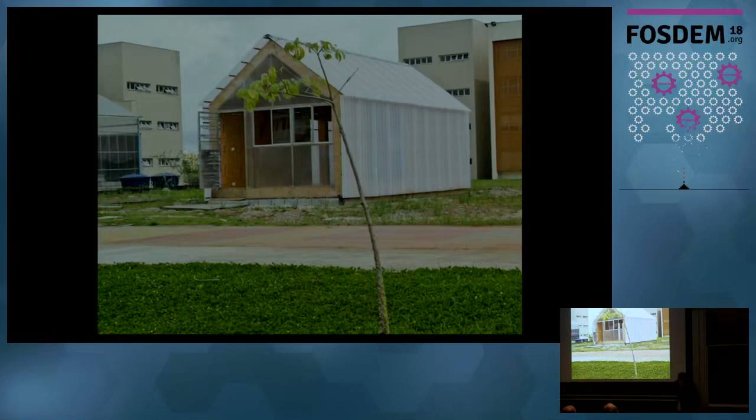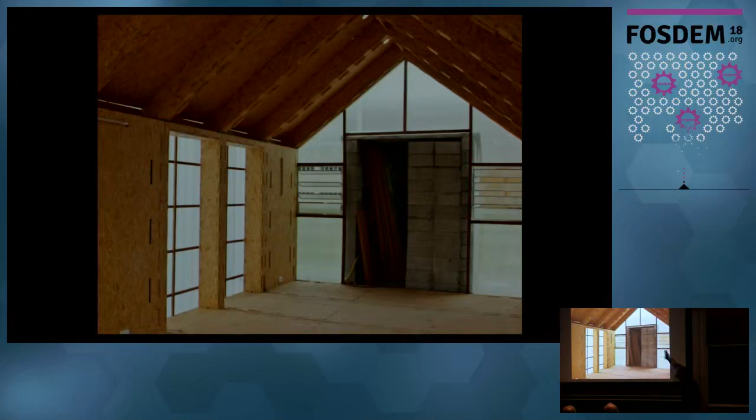So this is our building after all the work. It's been built during about 3 months. This is the inside. It's not 100% finished. You see that there are still a lot of problems, but it's basically there and it's done. This is how it started being built. You begin to build those structures that you see here on the ground, then you put them up, and then you put the parts that bind them together. I will explain all that a little bit later on.

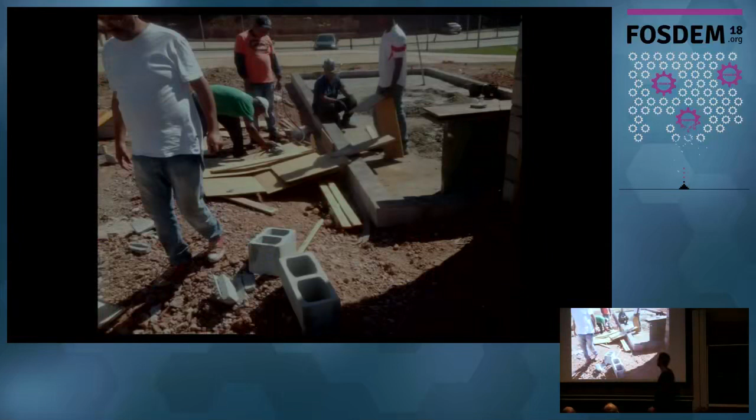So we began to build like that. This is the base wall; we didn't build that ourselves. We just hired a contractor to build these parts that are more traditional construction, and one part of the experiment was to have a mixed system with a part that's built by professional builders and one part that's built with volunteers, and see how that could work together, how the experience of one could help the other.

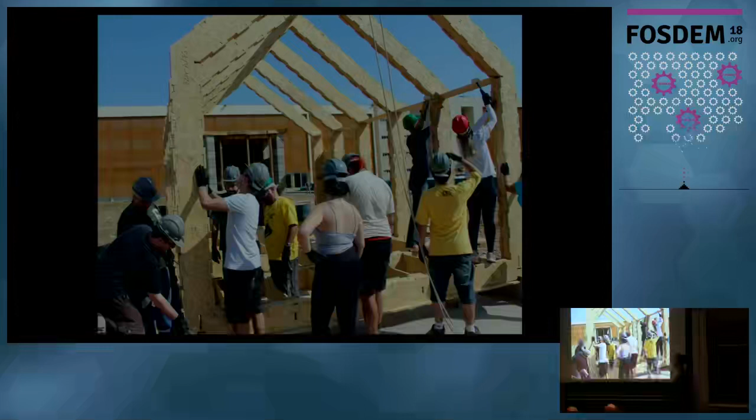And that's the actual building with everybody hammering crazily. And that's really the big part of it. If you look at the result, it's not so impressive. It's just a little house. But the process of it, everybody there who built this thing went out of there saying, this is the best experience of my life. I actually built a house.

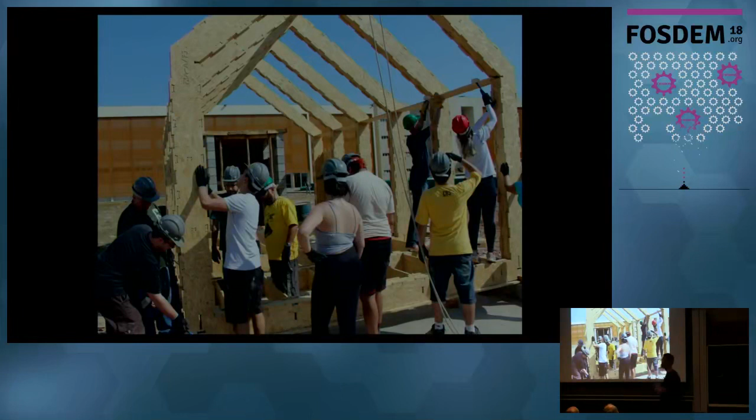And the whole point of the thing is actually to be able to build your own thing. Not so much that the result is so impressive or so special, but the fact that you are able to do it with no knowledge at all. Everybody who was there came without any experience, and after 1 hour you are a professional. You understood the whole system, and you can teach the others how it works because you know it by heart.

So this is the first person who lived in the house. This is after you finish the structure, you put the panels on top of it, and it's rigid. Normally, it doesn't need any more fixation or anything. We decided to put some screws here to make it stronger, because we're trying to make it last.

Because most existing WikiHouse projects, I will explain a bit more about WikiHouse afterwards, have been built inside an exhibition, for example, or were temporary things that were dismounted after 1 or 2 weeks. And now there are, I think, 3 or 4 that are built to last in the whole world. So this is still experimental.

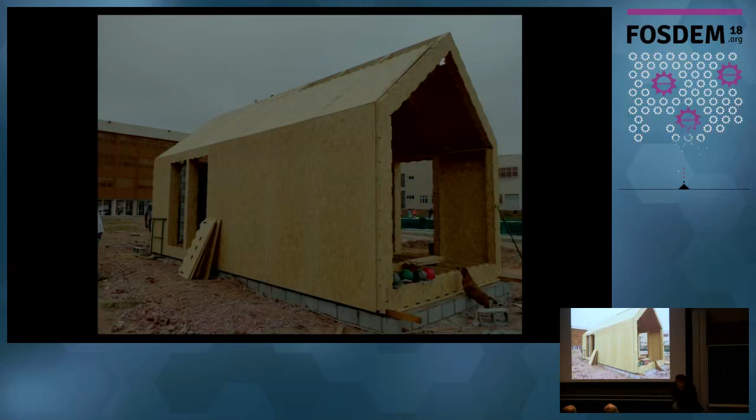We don't know how long it will hold, but we try to do our best to make it last many years. So that was a big problem. The construction was slow. We had to protect it from the rain, and we didn't think well about that. That was one of the biggest problems we met.

Then, since we are in Brazil, we have a very soft climate. Basically, you never have to protect against cold or against heat, because we're in the southern part of Brazil where it's never too hot and never too cold. So basically, you can forget about insulation.

I will show afterwards what they used to do in Europe, because the WikiHouse project is from Europe. So they have to be really careful about insulation and not letting any cold or any humidity enter, because humidity is terrible for the wood. It cannot take water, otherwise it begins to rot and to change shape, and that's terrible.

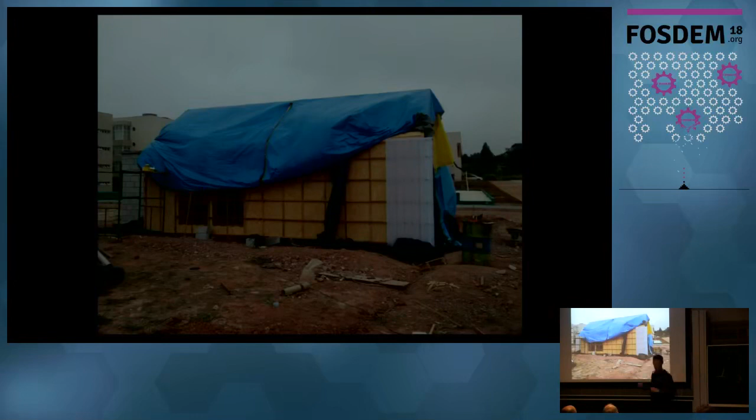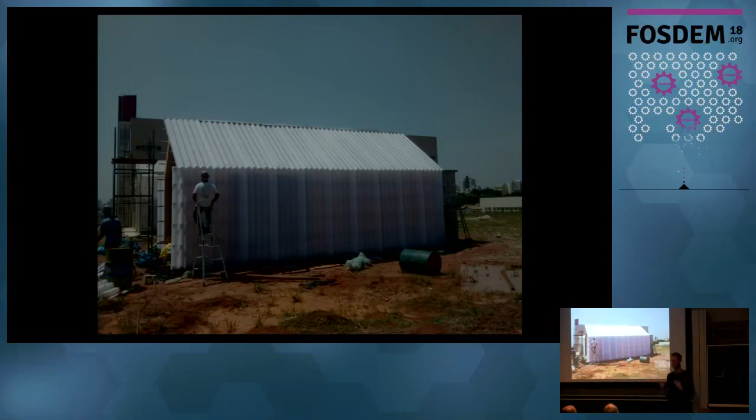But in Brazil we don't have so much of a problem because the air is helping us instead of being an enemy. So what we decided to do, instead of cladding it inside a skin, is to let it breathe. So we use this material, and we left a space between it and the wood, so the air could flow all the time and enter below and escape on the top. So the air would flow all the time and keep the wood dry all the time. And this is working quite well, actually.

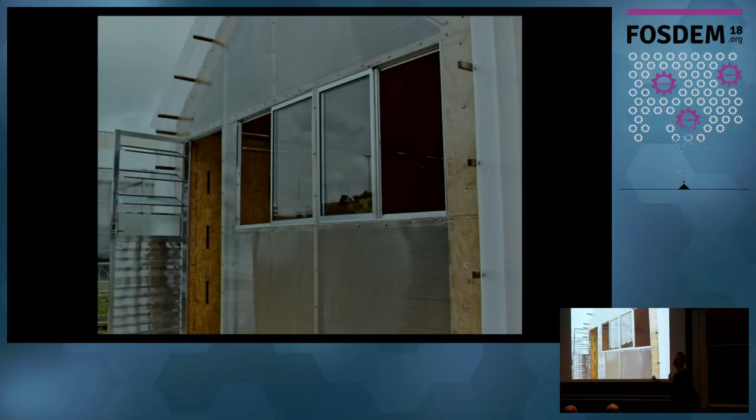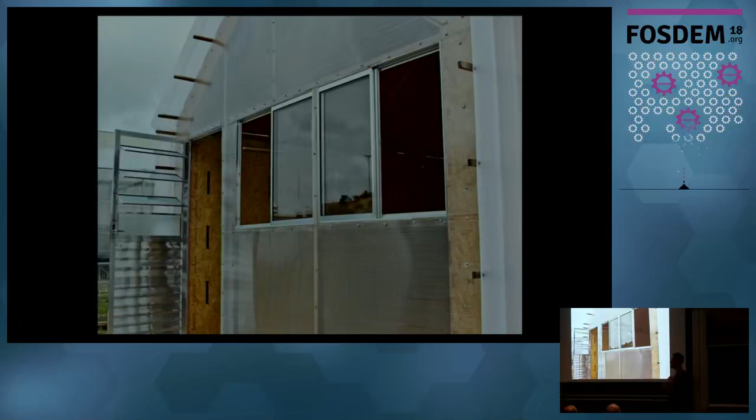So it's all open on the sides. The air can flow between all the parts of the structure, because we don't have to care much about being tight, because it's not important there. If you have a bit of air that goes in, nobody cares. It's even better. So we have a completely different situation than in Europe, and we were able to experiment with these quite interesting air circulation systems.

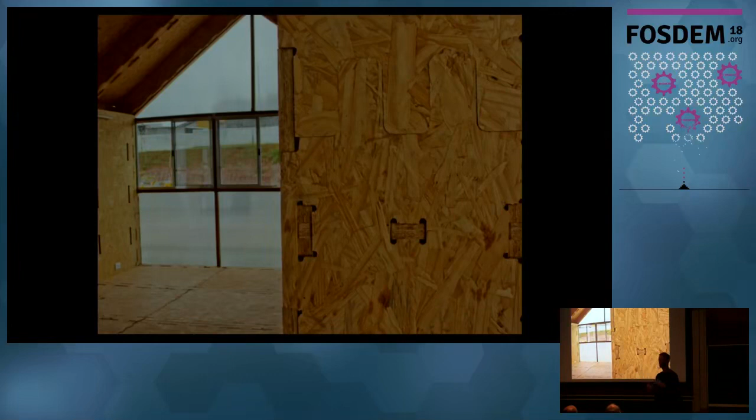And this is the inside. You see the details of how the joints are made, and they are really tight. That's the advantage of having this wood cut by a machine: the precision is absolute. So you can actually dimension these things to be just tight enough that you need a hammer to put them in. And once they're in, they are very strong. We did a bit of testing to adjust the calibration of the machine, but the first test was okay, because the precision is built in.

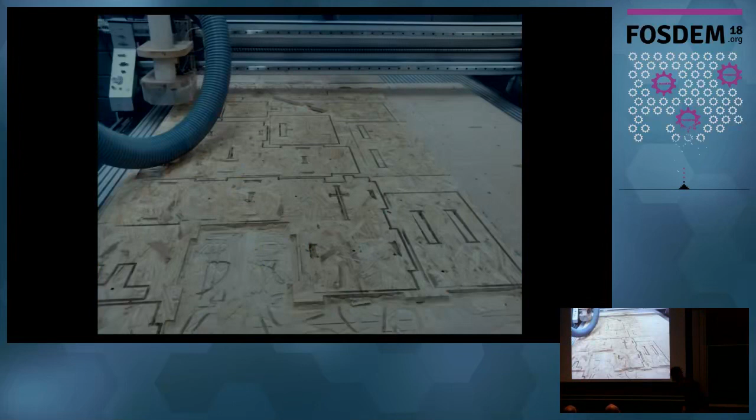And so this is what the machine does. It basically comes from your model. That's where FreeCAD will enter, and that's what I will explain now. Basically, your FreeCAD file goes to the machine, more or less. I mean, the process is quite straightforward.

And these are the pieces, it's quite a lot of wood. This whole house is like 170 pieces of wood. It's like 2 piles that size, and when it begins to accumulate like that, you really have a problem where to put them before you use them. And a little bit to show you the details.

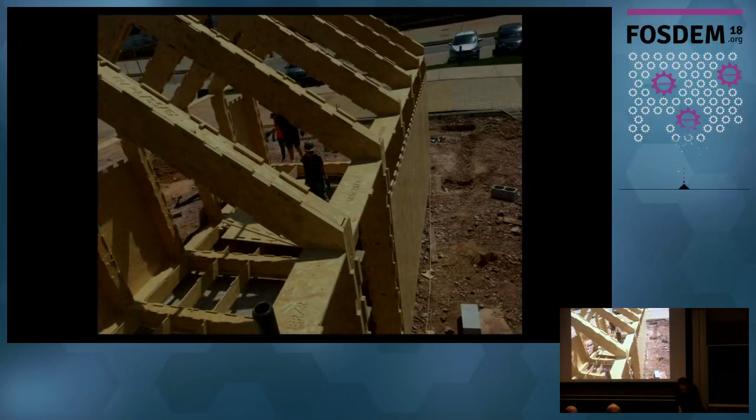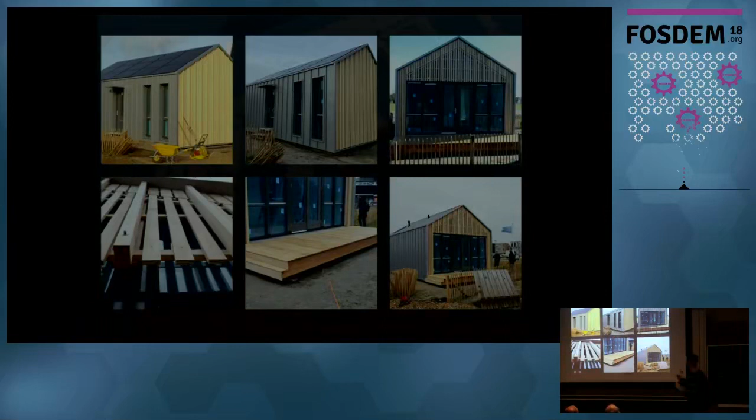This is another WikiHouse they've been building. They're finishing right now in Almere, near Amsterdam. There was a bit of competition over who would finish first, and we won. But ours is much easier, so that's why we won. We don't have half the complexity they had to cope with here. But if you see, it's exactly the same system, exactly the same shape and exactly the same problem. So this is the WikiHouse project that we took our shape and our system from.

This is a system that was begun in 2011 by two architects in the United Kingdom. They built, I think, above 30 or 40 in the whole world, but those that are still there, that were built to stay, there must be about 4 or 5 now in the whole world, I think. 2 or 3 in the UK. Now we have one in Brazil, and there is this one in Almere.

It's fully open source. You can just take their files and adapt them like it was code. It's 3D models and the whole system of how you build it. They have manuals as well. They have a lot of resources outside just the files, which are files as well, but you understood me. And it's now well tested.

I mean, you see that in the first ones there were lots of defects in how the joints would work, and the whole thing would go like that. And over the years, you have a lot of people who worked on this, even pretty famous engineers. And the system is now extremely solid.

These columns, as we call them, the main structures, are really impressive once you begin to build them. You have like 3, 4, 5 pieces crossing each other, and after the 5 pieces are there, it's extremely solid. Everybody will look at that, and you can really hang a lot of weight on them. And it's a heavy construction, so it has a lot of stability. It's really something that you feel has matured, and it's become something you can really trust.

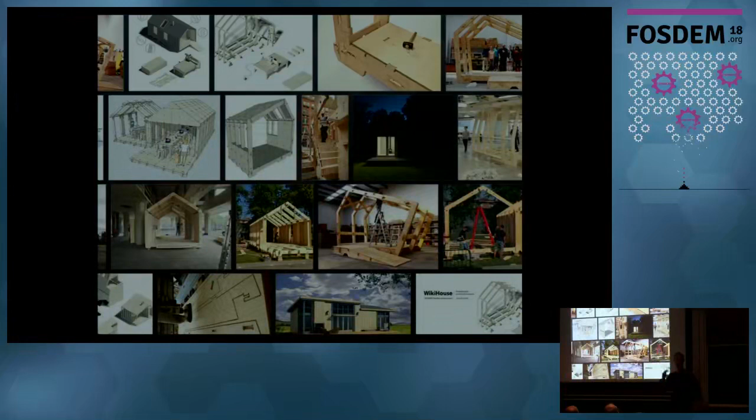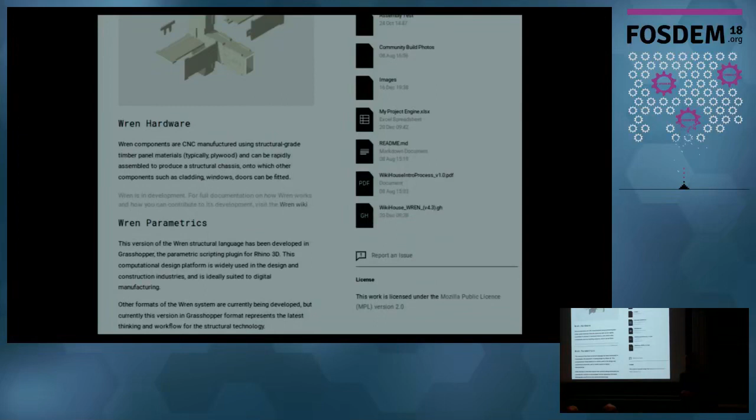That's the kind of stuff you find on the WikiHouse website. You grab their files. All the old ones are based on SketchUp. Those are SketchUp files, but now they're migrating to a scripting system for Rhino, so you could enter the parameters and it would build the 3D model automatically for you. Of course, we try to port that to FreeCAD. That's what's coming now. That's the kind of material you find there.

That's what we used basically without modifying anything, because we wanted to not try anything fancy and take their base system and try to do it well. Next time we'll try to experiment with some stuff, but we really tried to do it the best way we could, so we tried not to modify anything. And it's basically modular. You make it as long as you want. It's just repetition of modules.

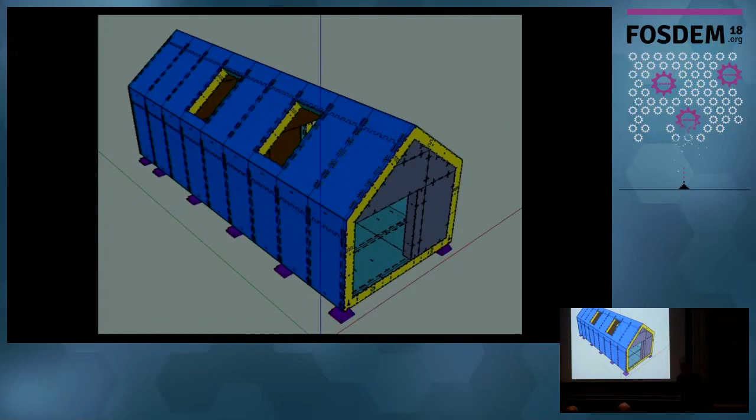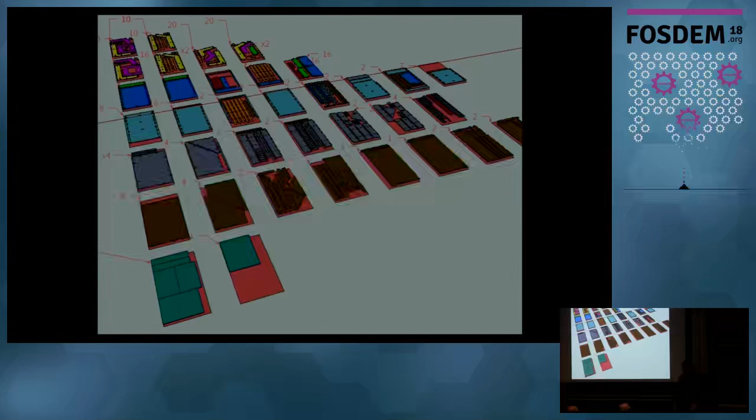In the WikiHouse files, you also find them already separated to be processed into CNC files, G-code files, to be used by the CNC machine. So this is all already set up, but we redid that part as well. And then you have mounting manuals. You see that they say you could use some screws.

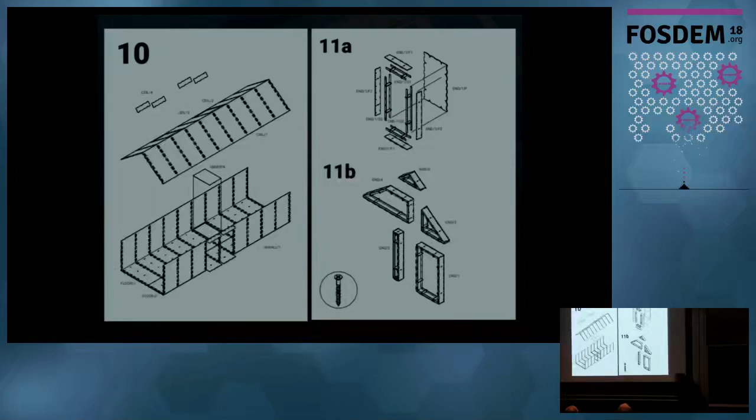Anything you would need to build afterwards, where you would need precise, controlled modeling that you could do and redo afterwards. It's generic, it's multi-purpose. It's used for any kind of stuff, not specially for buildings or for this or for that. A bit like AutoCAD. That was the strength of it. AutoCAD was something everybody used. Engineers, hobbyists, architects, everybody would use the same software.

And it's something that has been lost in the commercial world because they want to specialize, they want to sell specific solutions for each profession. We like to go back to the good old times with FreeCAD and try to have an application that's just a big generic thing that waits for your creativity to work on it.

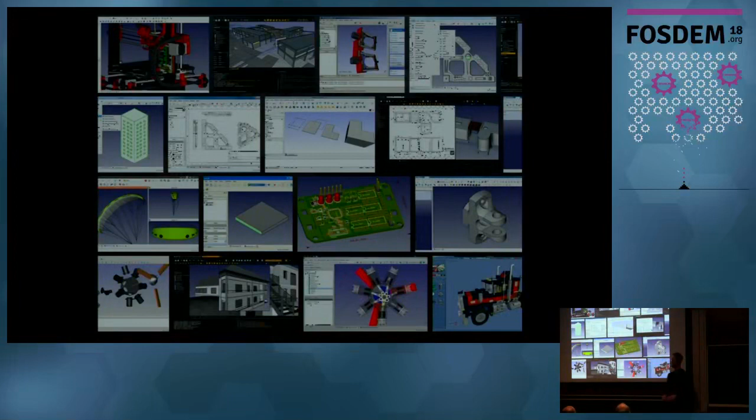And that's the website of FreeCAD. That's FreeCAD, basically. For who doesn't know it, it's a pretty common application. You have a very standard Qt-based interface, a 3D view and modeling tools. The interface has nothing special. That's the kind of stuff that people do with FreeCAD.

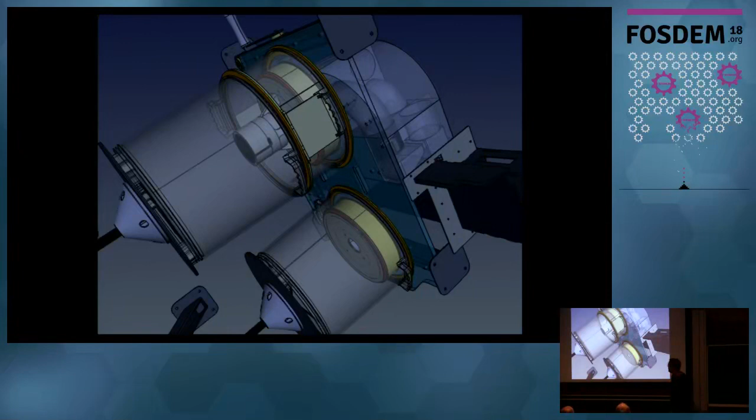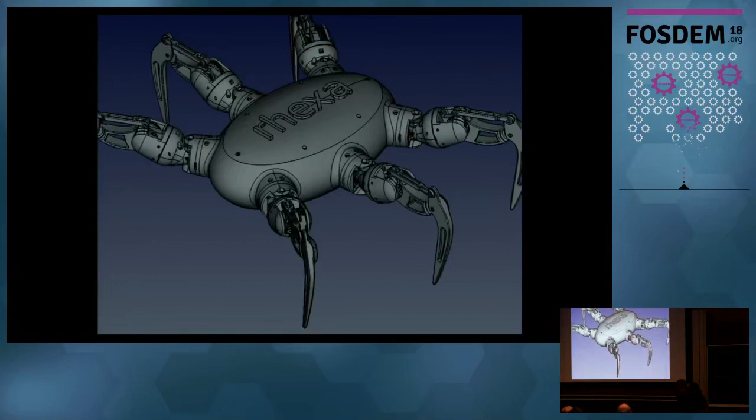Where is Juan? Here. He did it. This one. That's one of the last ones that appeared on the forum. Yeah, people do kind of crazy stuff with it, more and more, and houses as well.

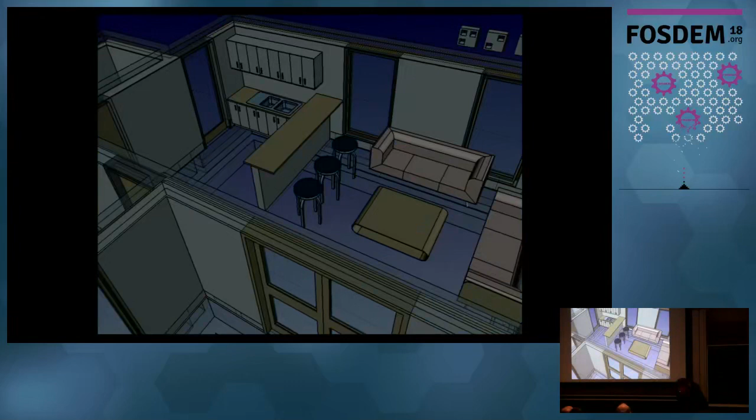So one of the first things we did with this project is convert the SketchUp stuff to FreeCAD. One of the main differences: SketchUp is based on mesh geometry, which is basically points and triangles. Everything is made of points and triangles. And in FreeCAD, we use BREP geometry, which is basically surfaces. BREP means boundary representation. It means that the objects are defined by their boundary

surfaces. And these surfaces are basically NURBS surfaces. Every edge of the surface is a curve, a mathematical curve. So you can basically do anything that could be a mathematical curve. That means you have extreme control over exactly where your surfaces pass through.

It's a bit the same analogy as bitmap and vector graphics. In vector graphics, you have the mathematical definitions of where the points are. If you zoom closer, you still see a perfect line. And in bitmap graphics, there are pixels. And if you zoom very close, you see the pixels. And it's the same thing.

Mesh geometry is like faceted. You already have the location of the points. And with BREP geometry, we can recalculate the triangulation anytime. So you don't have any resolution in it. So we took the files from SketchUp, we imported them in FreeCAD, then converted them to BREP geometry.

That's what we did. And then we had all the integration with other stuff that's not the WikiHouse. And then the fun began: you begin to be able to produce a lot of interesting stuff from your files. So that's basically what happens. You take these SketchUp models, which are like dumb objects, and then you extract the contour of these shapes, and these become parametric in FreeCAD.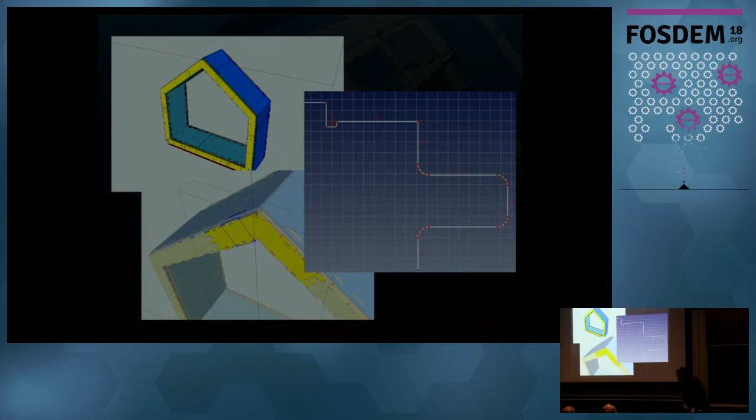You can put dimensions in these and say, this must be 20 millimeters, and then you have a parameter, and afterwards you can change that to 30 if you want, and you don't need to redraw the shape. It would just go for it. All this is really step-by-step work that you don't need to do at once, and then you can refine over time. This is the finished model in FreeCAD with all the rest. It's not only the WikiHouse.

And you see one of the good things is that you can organize that really well the way you want and group the objects by type. Of course it's in Portuguese, but just to give you the idea that you can really go into pretty complex models and keep something that's really easy for a human to understand how it's organized. And that's one of the big points, I think.

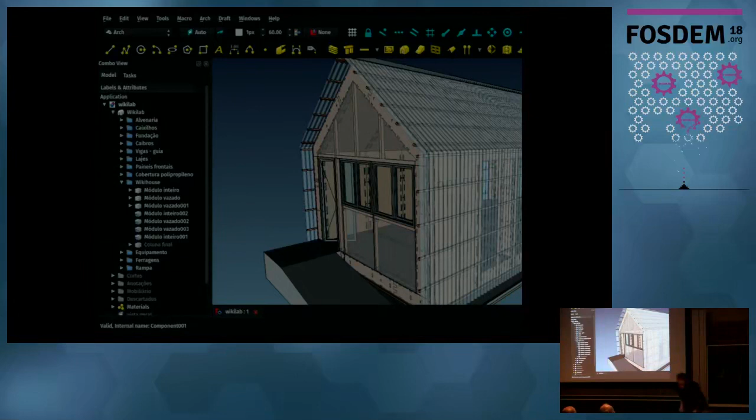This is when you remove the stuff on top of it. It's really the wooden construction, the inside, and all the piping is there. Everything is in the model, basically. It's pretty complete. And so we had this model that's the whole building, and we had another model that's just one element, and that's the one we use to produce the files for the CNC machine, because it's basically 7 of these modules. So we did just one and used the same output seven times, basically.

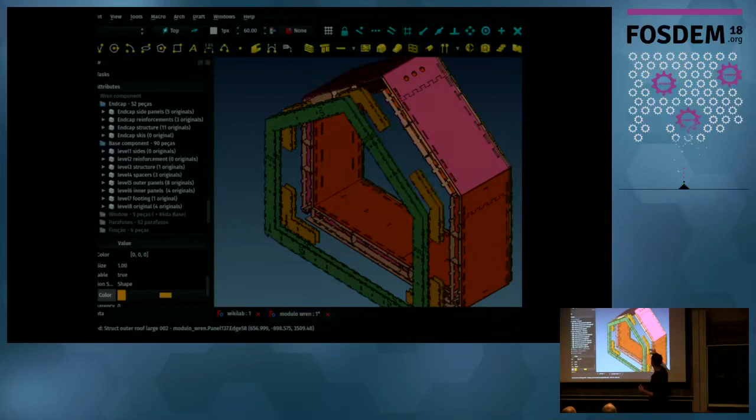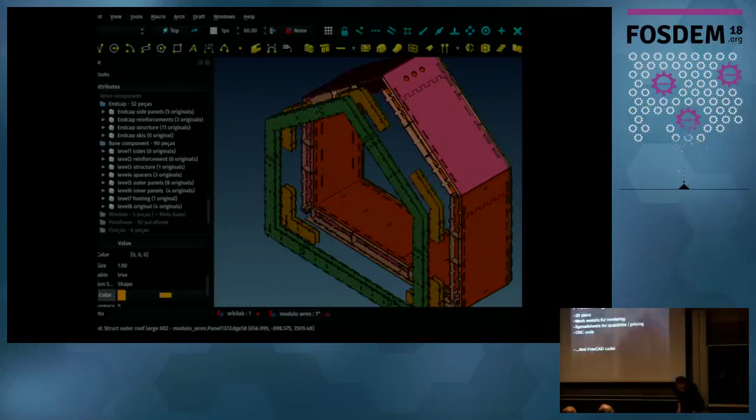And so it's pretty well organized already from the WikiHouse project. You have these side panels, you have the inner structure, then you have the reinforcement, and then you have the side plates. Everything is already defined and separated. In the WikiHouse project, you just have to understand how it works, and it's really amazingly well done. And this is what we end up producing with it. All these things that I will show now that you need to have.

And of course, the most beautiful thing about using free software to do that kind of experimental stuff is that you end up coding, because you end up adapting it for the special case. And so we had quite a lot of new FreeCAD code being done thanks to this project as well.

That's the kind of 2D plans that you need to get the authorization to build the thing. In our case, we were on the university grounds. We had to ask for authorization from all the university instances and stuff. That was the worst part of the whole thing, being able to obtain all those authorizations. So you need these drawings to be able to show them.

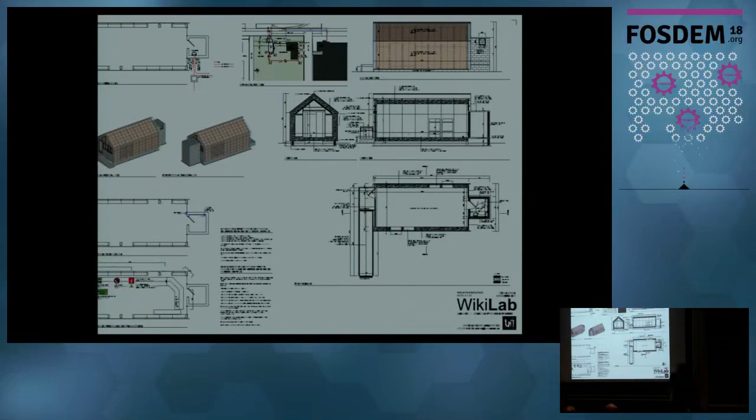That's the distance between the two that we're trying to reduce. The idea, talking the other day with Ton Roosendaal from Blender, is to have one button you would push in FreeCAD, and it would land in Blender with a preset of lights already on, so you would have almost a one-button render. And he's really interested in developing this further.

So we should be able, for next time, to reduce the distance to producing a nice render. And there are other solutions as well, like real-time rendering, that are becoming interesting to use together with FreeCAD, so you could have all the modeling in FreeCAD and just export to some other application to do the final image.

These spreadsheets: one of the biggest advantages of having a sound model of your building is that all the quantities are there. How much wood will I need? Exactly how many square meters of wood would I need? How many bricks would I need? And once you have that, putting prices on it

is pretty easy. In Brazil, we are lucky enough to have several public sources of construction prices maintained by the federal government. They take all the public works they do and extract the median price of one square meter of brick wall, one square meter of floor, and so on. It's public, you can use it for your own project, and it's basically the same price you will find the day you build. So if you have the right quantities, you have a really precise estimation of the final price

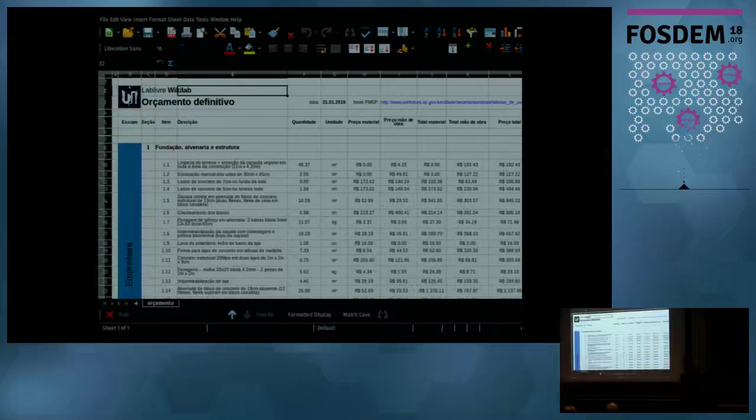That's true, but we had a hard time finding a big enough machine around the construction yard. There must be a couple of them in São Paulo, which is where we were building, and this one was really convenient and close. It was people from inside the open source community, and it was much better to go with them given the circumstances, so we stopped looking for other possible solutions. Probably the laser cut - you'd have maybe 2 firms in São Paulo who'd do it, and they'd charge a lot more, and this might have made things go wrong.

This is basically the kind of file you get from your panels. Once you have all your 3D models, these green lines are the G code. It's basically the path that the head of the machine must walk on the piece to carve it - it must go up, go down, and do the shapes.

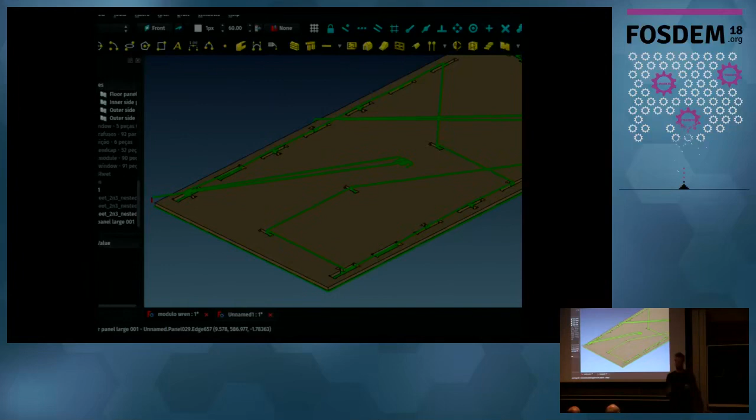This is basically G code, the language that most cutting machines in the world, even 3D printers, use. Each machine vendor has a different dialect, so you have to do adaptations depending on the machine, but it's basically the same system.

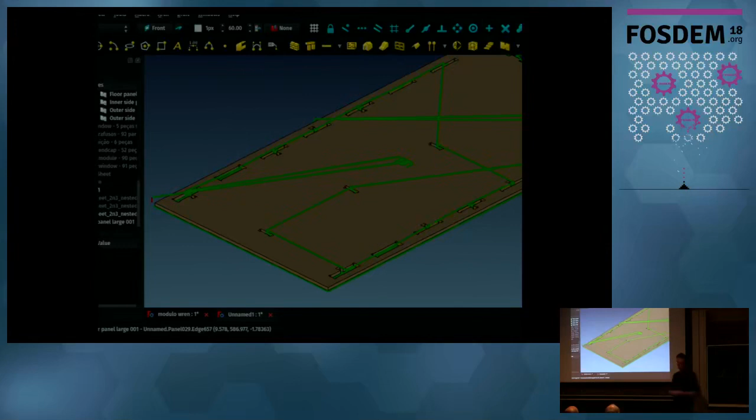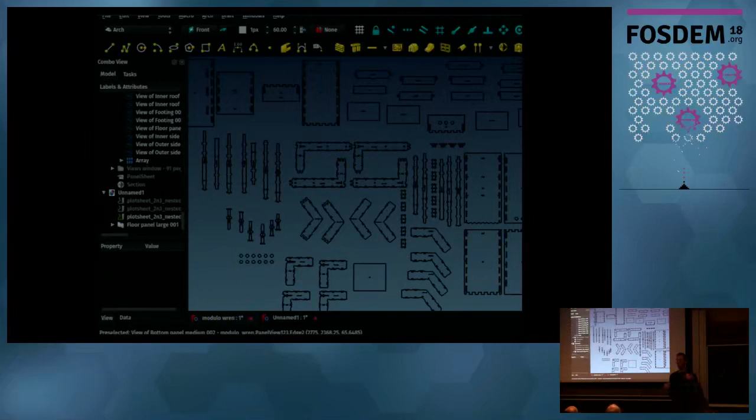In our case, we weren't able, last year - in the half of last year - to do it all in FreeCAD. So basically what we did was export these 2D shapes of every piece of the model, and then the shop where we did the cut generated the G code from these files.

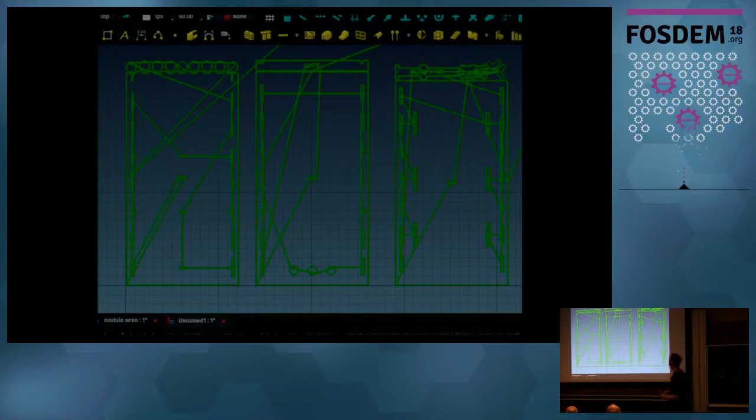Because it was like 8 months ago, and lots have been done since then in FreeCAD that wasn't there at that time, we had to produce it that way. But now we'd be able to do it in FreeCAD if we had to do it today - everything is there to make this G code and export it directly to a file ready to send to the machine.

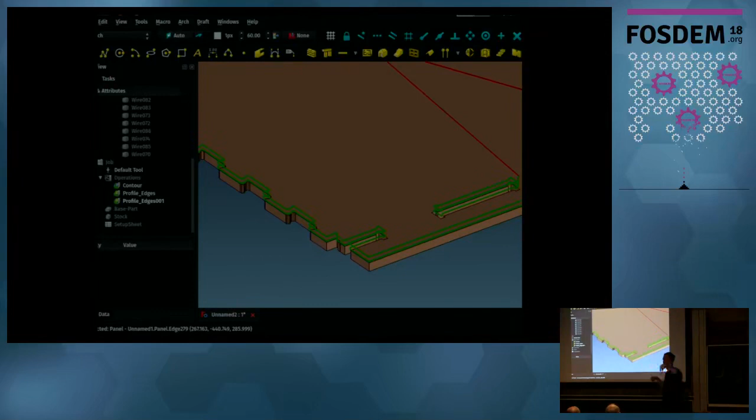Is that computed or is it manual work? It's computed. You still have to, for example, take this face - let me show you the path module. We now have a lot of tools to take one piece, take the driver face of it, and then it would calculate all the paths automatically.

That's all the work that's basically been done last year. There's been a lot of work on that CNC part, and now it's totally possible to take all your panels and from each one generate automatically a path. You have a lot of options, like if the holes have to go before the external profile, if you have to change the order, and that kind of stuff.

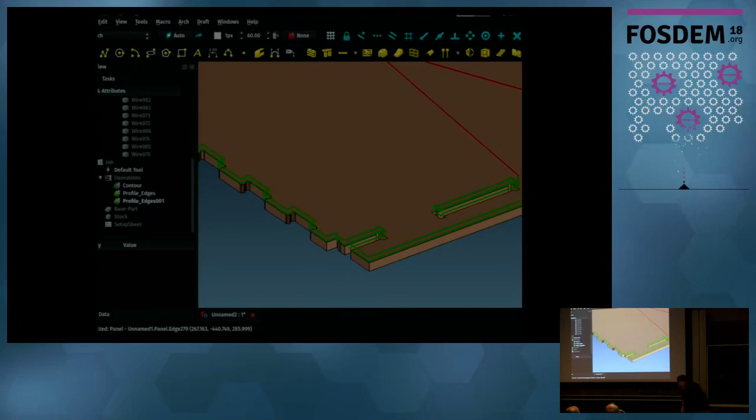It's really becoming cool. That's another tool we've been working on because of this project: a way to gather a lot of pieces and join them in a special, defined area, which would be your base wooden material, and to try to lose as little material as possible.

Is that done by algorithm or by hand? This is done automatically. This interface is basically what you use—that's the new nesting tool. You define the container, you add the shapes in it, and it's still pretty slow because it's new and not very much optimized, so it runs like half an hour for something like that, but that will get better over time. We need to optimize it.

But it basically works. That's the new Path workbench. You see it has quite a lot of tools already. Basically now it works like you define a project, a cutting project. That's the interface here. You define your base, the size of your base material, where the start point is—the head of your machine—and then it goes to fill this up. This is a typical Path job, so you have a lot of setup to do, but then you just add operations one after the other, and the machine will do one after the other.

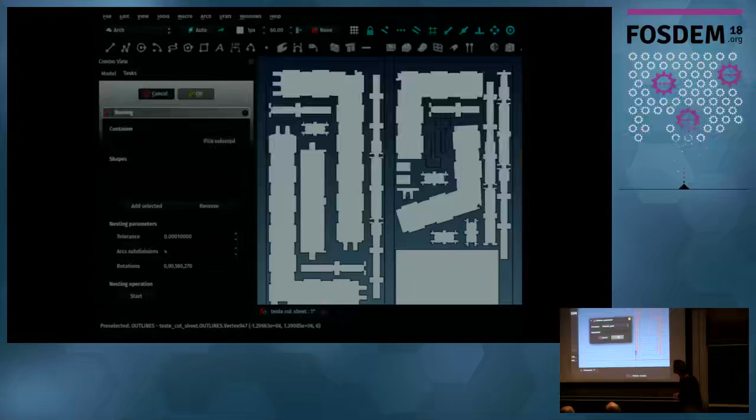It's getting really interesting to work with. And then at the end you select one of the post-processors, which will convert the generic G-code we use in FreeCAD to a specific machine. At the moment there are like 5 or 6 that work well, and LinuxCNC is one of the most well-known controllers for this machine, so that's the one mostly used. That's the kind of machine that does the work.

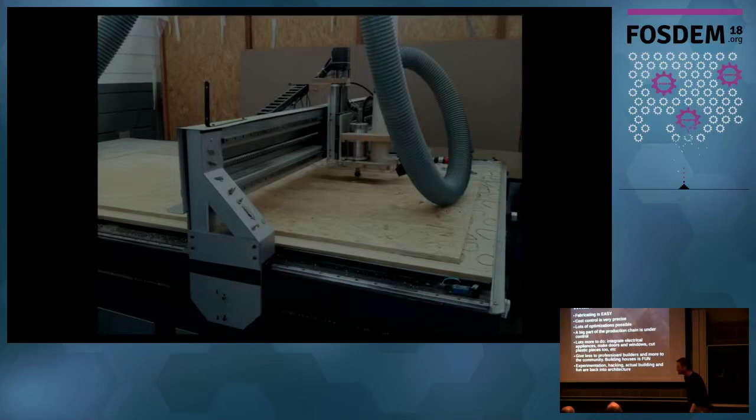Basically this is what we learned from the whole experience of this project: that it's really easy to fabricate. Architects—I'm an architect by trade, I'm not a programmer, I went into this on my own—but architects aren't used to touching fabrication, they just buy stuff that already exists. This is totally a new area we can enter by using this hybrid space between fabrication and architecture, and there's a whole world that's not really explored, and it's much easier than what us architects would think.

And cost control becomes very precise because you have a lot of data to work with. And yeah, I won't read all that stuff, but there's a lot of experimentation and learning to come from this. And that's it.